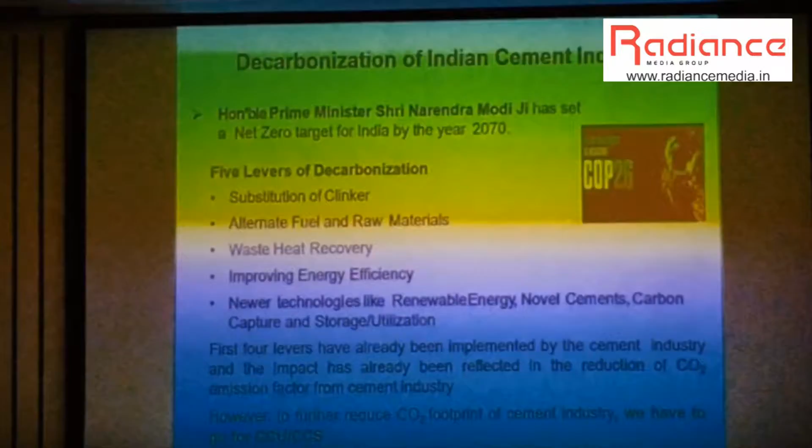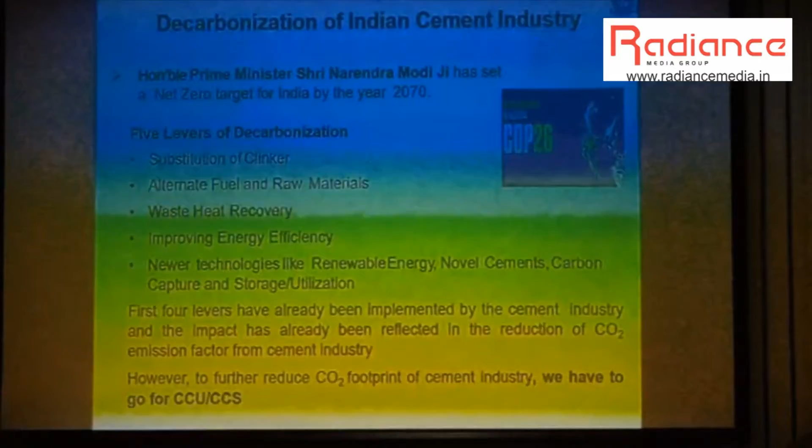We generate about 232 million tons of fly ash, of which cement plants use only 25%. Slag is completely utilized as granulated slag. We now produce about 67% Portland Pozzolana cement, 8 to 10% slag cement, and composite cements. New cements under trial include Portland limestone cement, Portland dolomite cement, and Portland composite cement with fly ash and limestone. We aim to convert to 100% blended cement within the next 3 to 4 years, which will indirectly help reduce carbon dioxide emissions.

Similarly, alternate fuel and raw material use has improved, with thermal substitution rates of 2% to 6%. We use all types of alternate fuel, hazardous and non-hazardous, as a replacement of kiln fuel. This is also helping reduce carbon dioxide emissions.

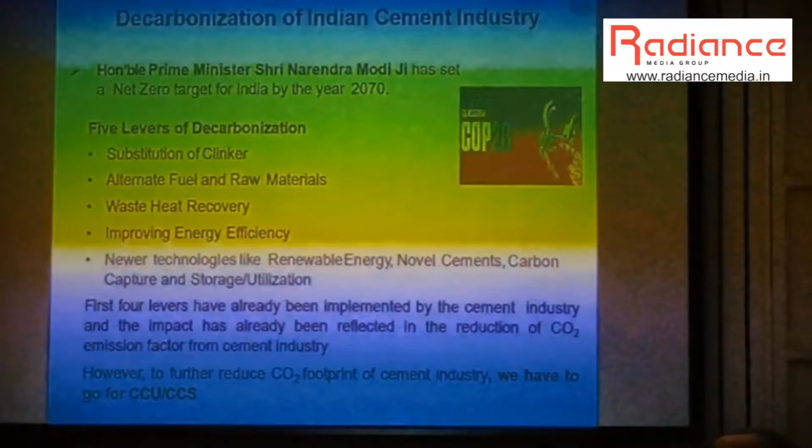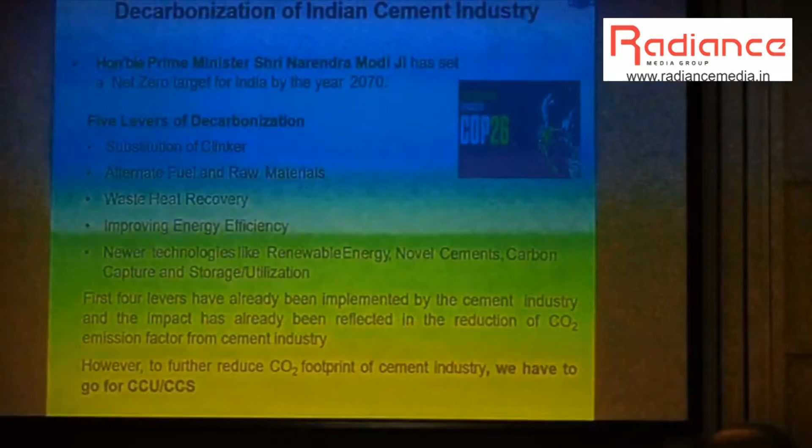Similarly, for waste heat recovery, the potential is 1000 megawatts and we are currently doing 540. On energy efficiency, the cement industry is highly efficient in both thermal and electrical energy. Our best figure in India is 667 kilocalories per kg of clinker, and 56 kilowatt hours for electrical energy. These four areas are where the cement sector is doing well.

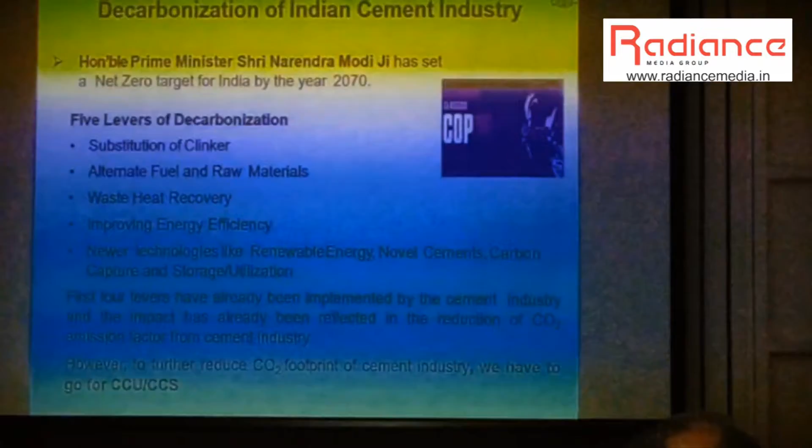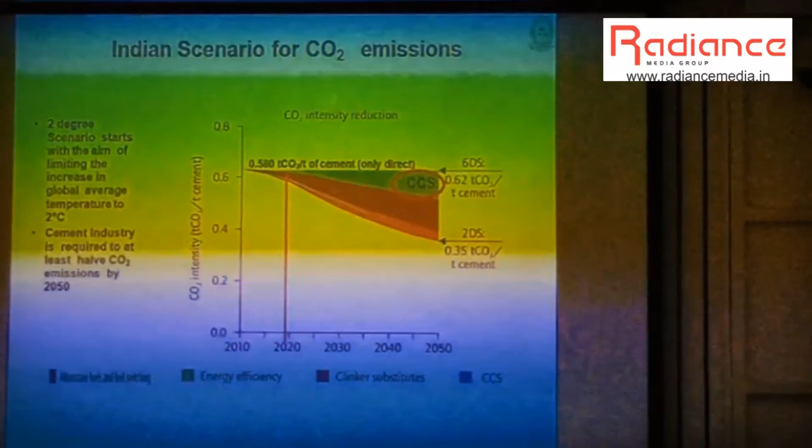Now coming to the last area: newer technology like renewable energy, novel cement, and carbon capture and storage. We have already collected many technologies that have been implemented earlier, and we will analyze and implement them. This figure shows the most potential drivers for reduction of carbon dioxide emissions.

The target is 0.35 tons of carbon dioxide by 2050. The most important factor is how to further reduce the clinker factor in cement, because currently we are using about 0.71 clinker in cement. This will be further reduced, as we have already identified other materials, and NCB is already doing research on this.

But without CCS, we cannot be carbon neutral. That's why the time has already come for it.

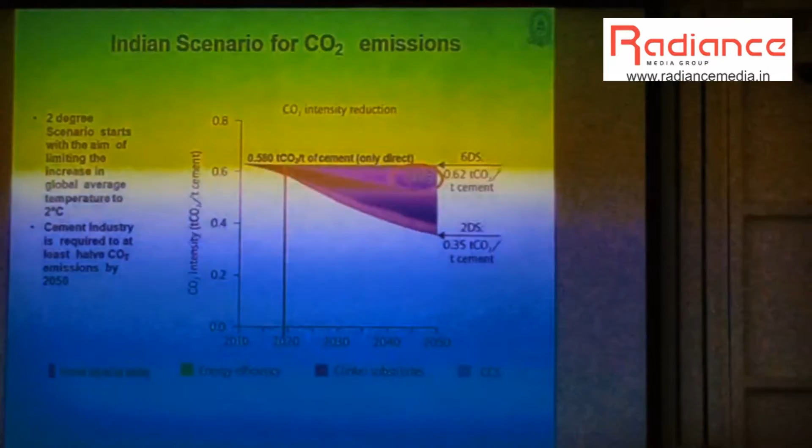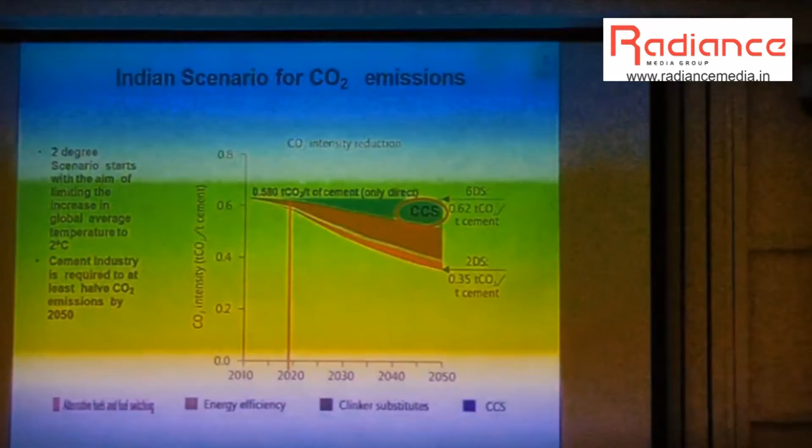We are very happy to be associated with this type of seminar where we are gaining knowledge, and we have collected so much literature. Our Indian plants and the Indian cement industry, and also IOCL, are doing a lot of things. When there is exchange between the cement industry, steel plants, and the oil industry, we can learn a lot and also implement it.

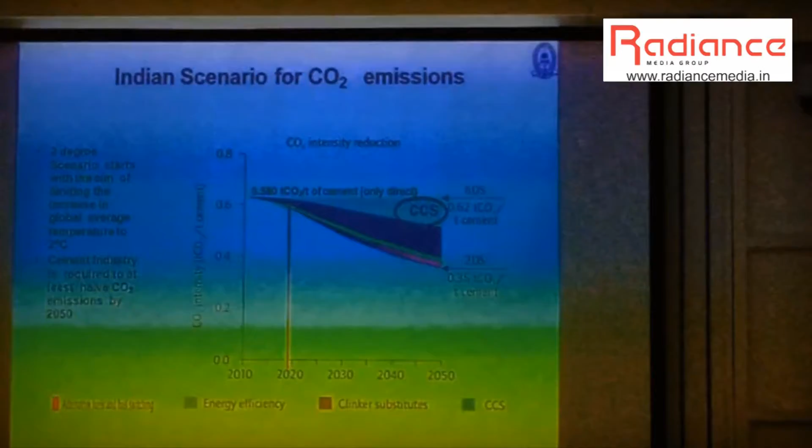We are also happy to know that we have taken Ramkumar Sahib into our research advisory meeting committee. We are inviting him on 6th April as well, so please come there, and we will also see your plant to understand how to implement and replicate things.

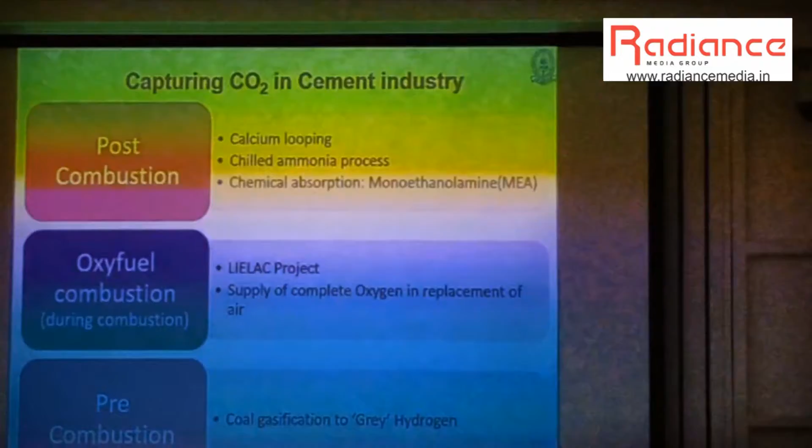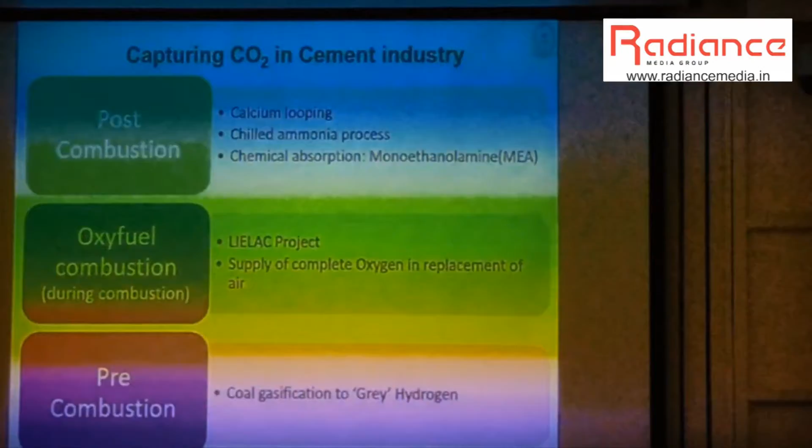Now coming to capturing CO2 in cement industries, there are mainly three areas: post-combustion using calcium looping or chilled ammonia processes, or chemical absorption by monoethanolamine, and oxy-fuel combustion. The LIELAC project is already underway. Instead of air, we can inject oxygen so that during combustion air is replaced, and we can also get better quality clinker.

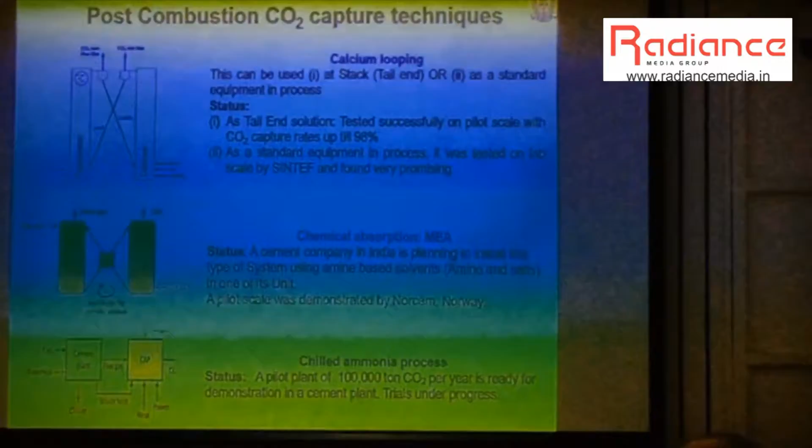Pre-combustion involves coal gasification to grey hydrogen. This calcium looping technology has already been implemented at trial and pilot stage successfully, with CO2 capture rates up to 98%. A standard equipment process was tested in laboratory scale by SINTEF and found very promising.

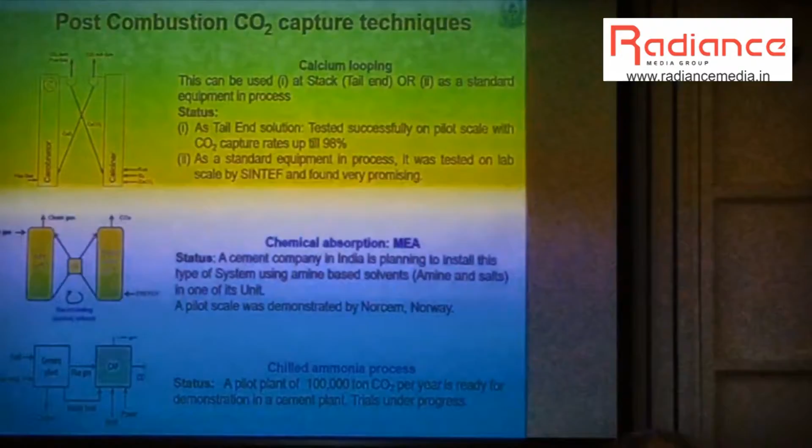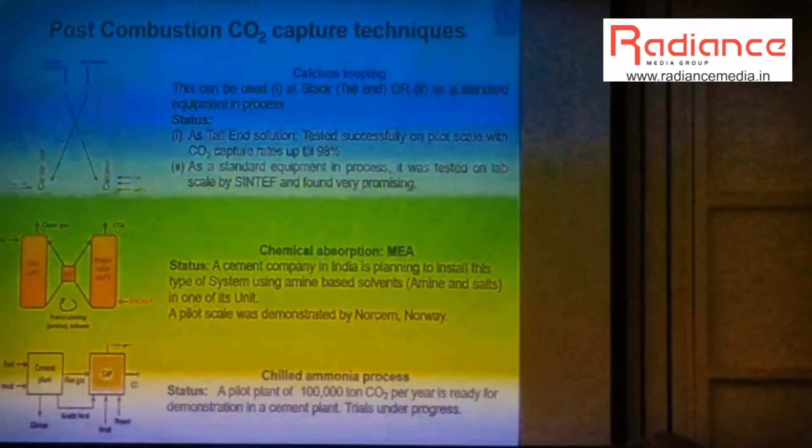So now we are at the literature survey stage, sir, collecting everything. Calcium looping has not been done at our place yet, sir. We have not tried anything in India for this; it is still very much in infancy globally. We have now collected all the international practices.

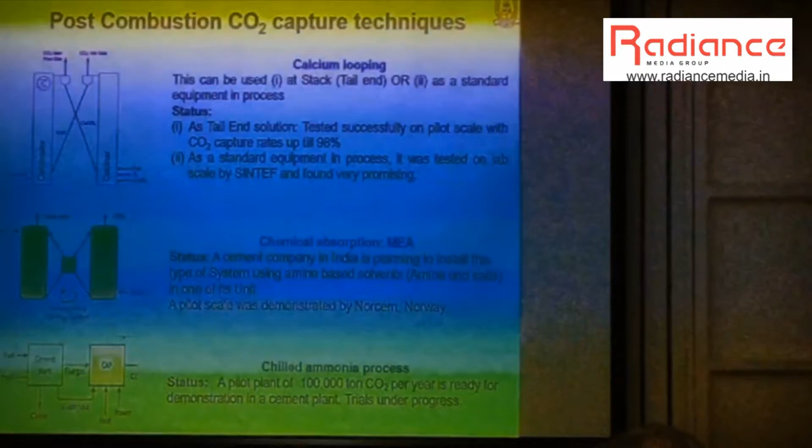Then there is chemical absorption using MEA, monoethanolamine plants. Our Dalmia Cement, Mr. Singh, has already committed that they will go through this process by 2040, as they have declared they will be carbon negative by 2050 instead of just carbon neutral by 2050. Chilled ammonia processes are different technologies that are already applicable and available.

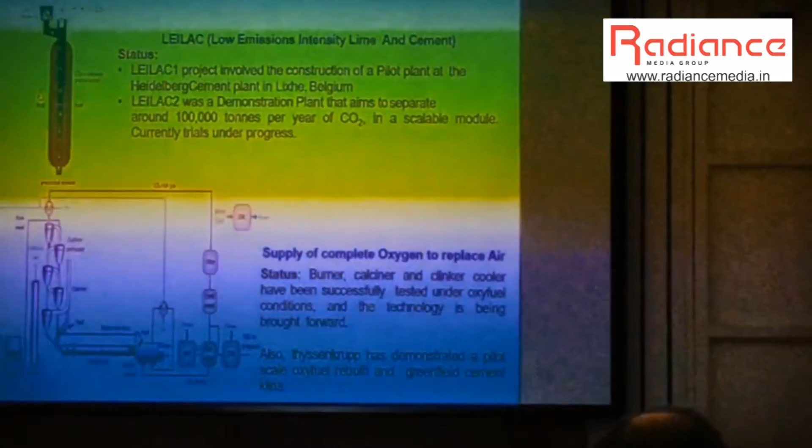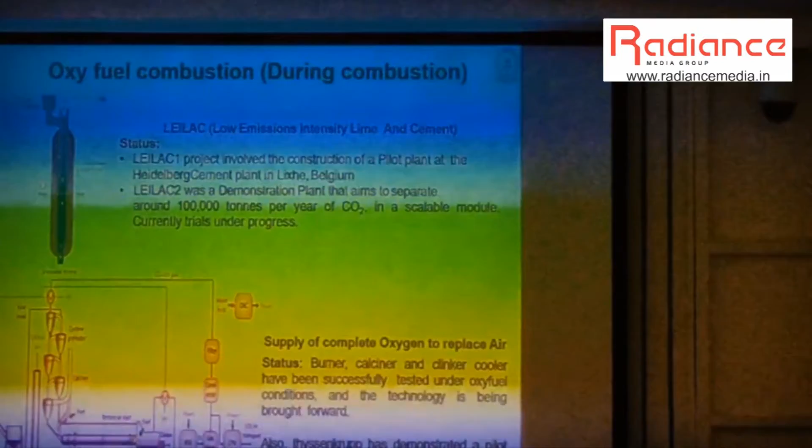LEILAC technology stands for low emission intensity lime and cement. This LEILAC project pilot plant is already coming up at Heidelberg Cement in Belgium. The LEILAC demonstration plant aims to separate around 1 lakh tons of CO2 per year in a scalable module, and trials are currently under progress.

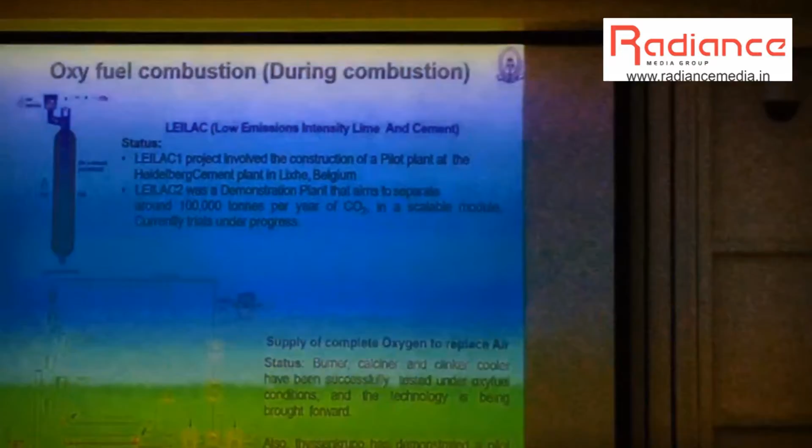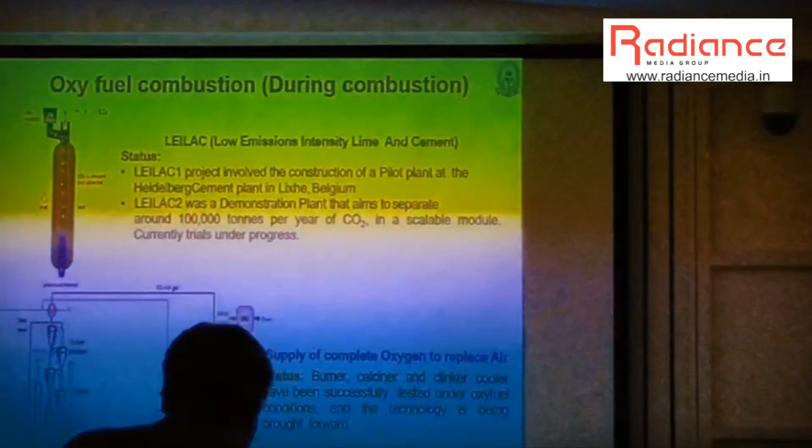Next is supply of complete oxygen to replace air. In cement plants, this pure oxygen can also be put in the burner, calciner, and clinker cooler, which have been successfully tested under oxy-fuel conditions, and the technology is being brought forward. thyssenkrupp has already demonstrated a pilot plant for oxy-fuel retrofit and greenfield cement kilns.

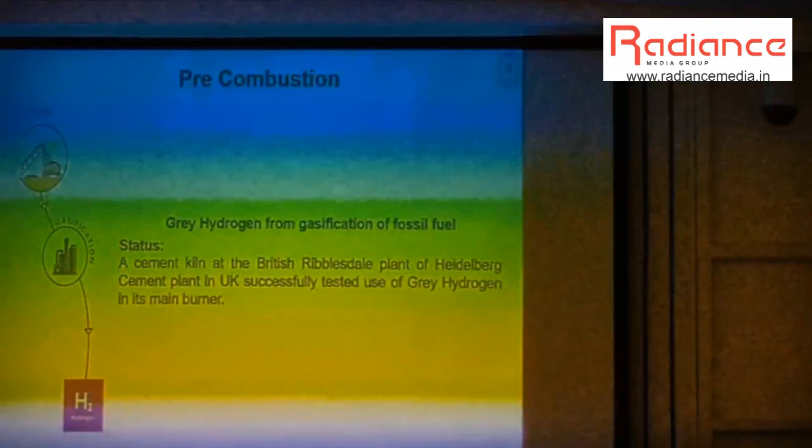Grey hydrogen from gasification of fossil fuel, that also in the cement kiln at the British Ribblesdale plant of Heidelberg Cement plant in UK, successfully tested use of grey hydrogen in its main burner. So these are the different technologies already available, also in the pilot stage.

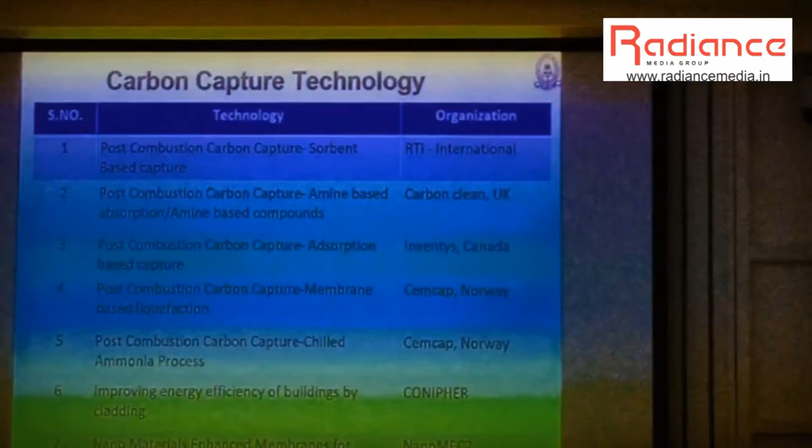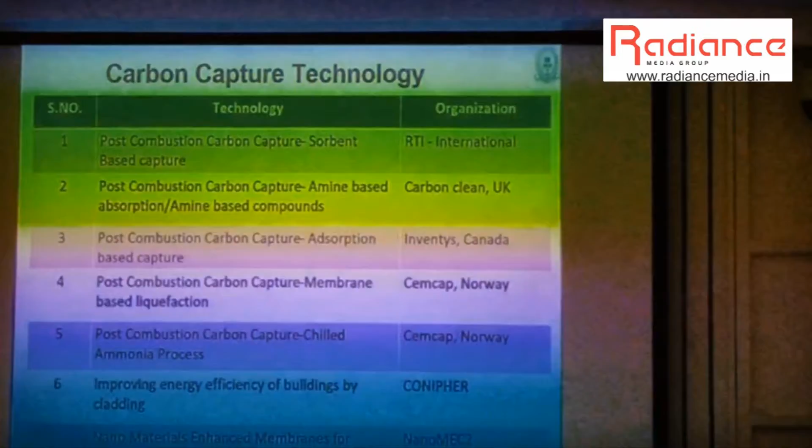Post-combustion carbon capture by RTI International, amine based; then Carbon Clean in UK; similarly post-combustion carbon capture adsorption Inventys in Canada; post-combustion carbon capture membrane based liquefaction in Norway; post-combustion carbon capture chilled ammonia process in Norway; and improving energy efficiency of building by CONIPHER; nanomaterials enhanced membranes for carbon capture by NanoMEMC2.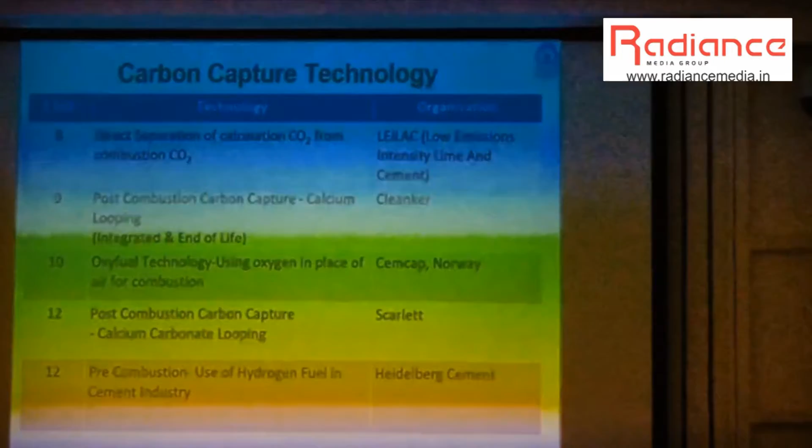Direct separation of calcium calcination, that is LEILAC technology. Then post-combustion carbon capture calcium looping Cleanker technology organization, oxy-fuel technology using oxygen in place of air from Norway, post-combustion carbon capture Scarlett, and pre-combustion use of hydrogen fuel in cement industry, that is Heidelberg Cement pilot scale.

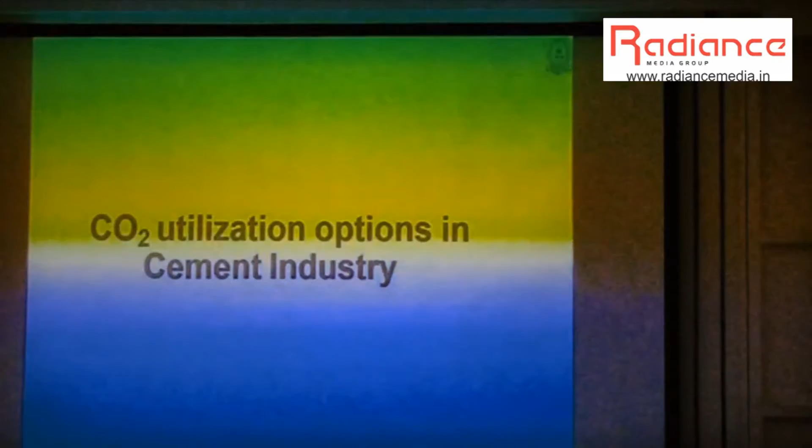Then CO2 utilization, because sir, we are now in the literature survey and also we want to collaborate with the people, also how to do it in Indian plants.

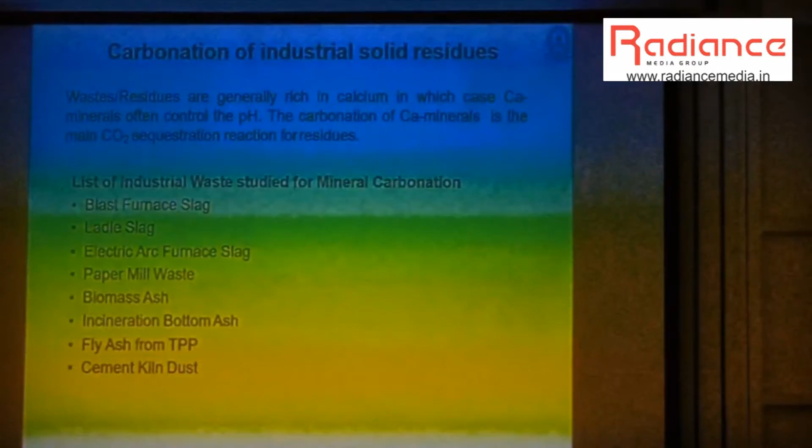Then chemistry, mineral carbonation - already so many people have already presented this, skip all this. Slags, mineral carbonation, blast furnace slag, ladle slag, electric arc furnace slag, paper mill waste - already discussed, and we also do similar things.

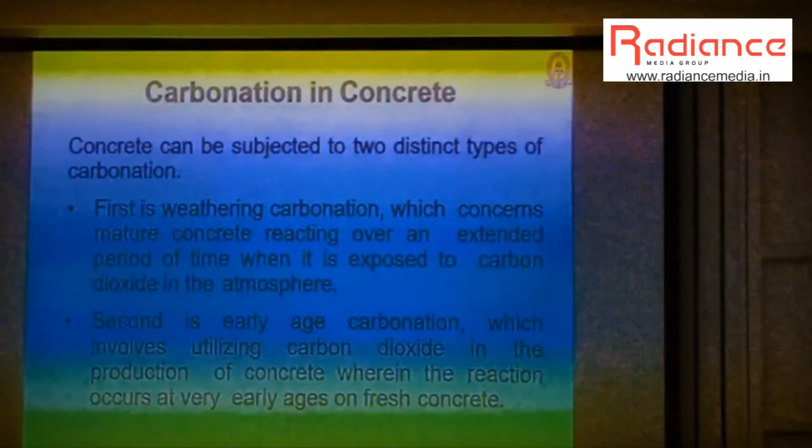Carbonation of concrete, this is most important thing in the cement plant, because whenever we are calcining limestone in the process, the carbon dioxide which is captured, we have to capture it and store it, and that will be utilized in the concrete stream. If that is possible, then completely carbon dioxide emission can be cured in the concrete, which will give fresh strength.

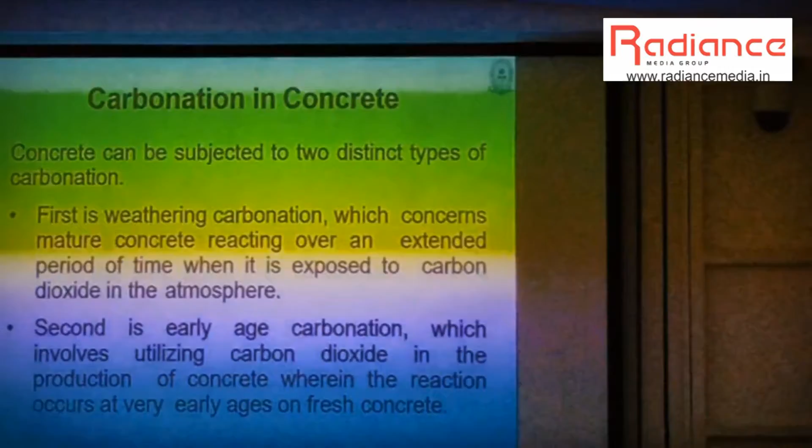That is early carbonation, which involves utilizing carbon dioxide in the production of concrete, when the reaction occurs at a very early stage. In that case, you can get higher strength of the concrete. You inject the carbon dioxide, and in that case, cement consumption in the concrete could also be reduced to get the same strength.

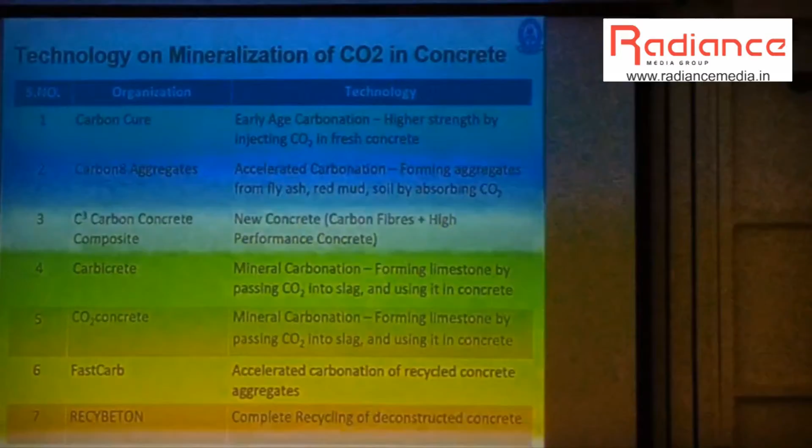So these are the different technologies again: Carbon Cure, Carbon8 aggregates, carbon concrete composites, Carbicrete, CO2 concretes, FastCarb, RECYBETON. These are the technologies already available, and we have already formed 22 technological groups in NCCBM. One group is already working on this.

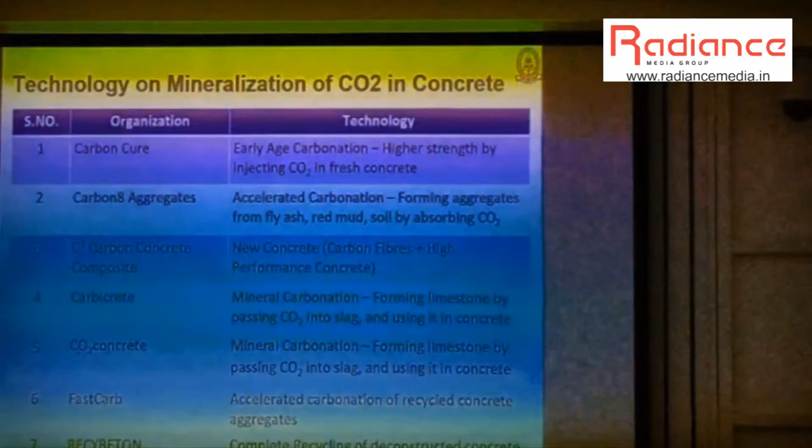These are the different technologies and mineralization. Then low carbon clinkers - this is the last slide.

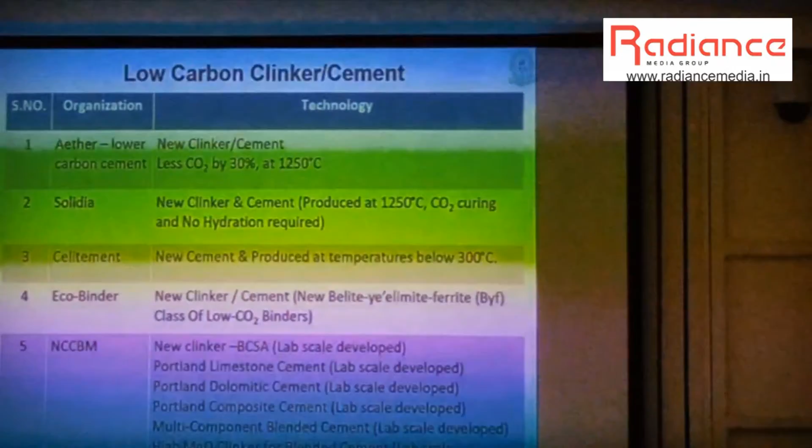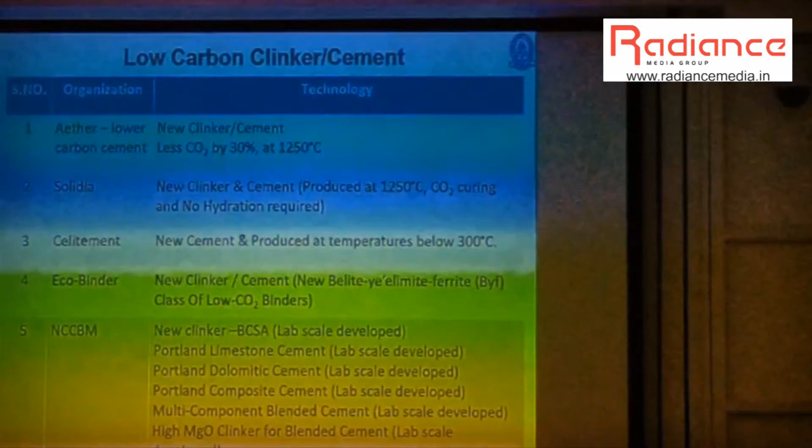Actually, sir, in different countries, since last 60 years we have not changed the clinker chemistry - the same C3S and C2S running. As a result, we have already utilized all high-grade limestones and high energy consumption also. It's a big problem. That's why now other countries, and NCCBM also, have done new clinkers.

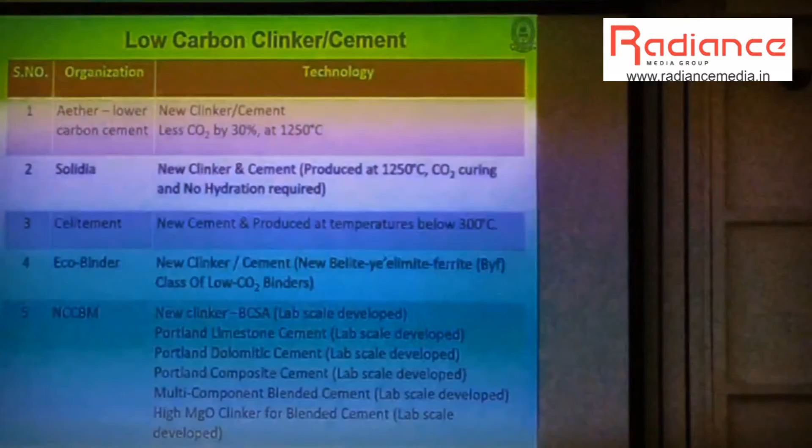That is Aether clinker, developed by Germany and China. They are using it up to about 25%. That Aether clinker has new chemical phases by which there is a reduction in temperature and also carbon dioxide emissions. Solidia Technologies in USA - the fellow from India, he is also doing well, Dr. Sahu.

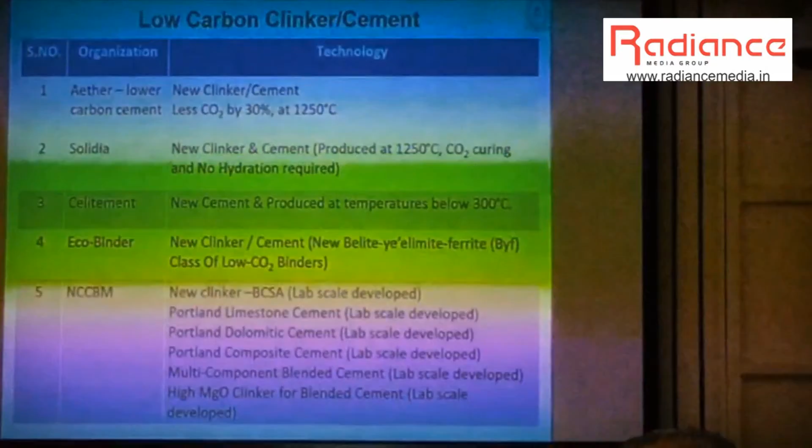The Solidia Technology new clinker phases, which will also be cured with CO2, and there is also a 30% reduction in carbon dioxide emission, and also less energy consumption.

Then Celitement cement, new cement produced at temperature below 300 degrees centigrade. Then Eco Binder, new clinker cement, new belite aluminate clinkers.

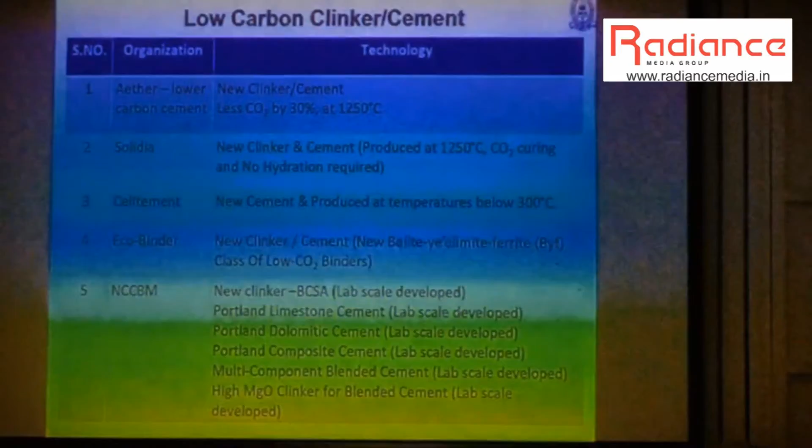But our institute, NCCBM, the R&D organization under the Ministry of Commerce and Industry, during the last period we have already developed one clinker, which gives high strength, and also 30% reduction in carbon dioxide emission is already there.